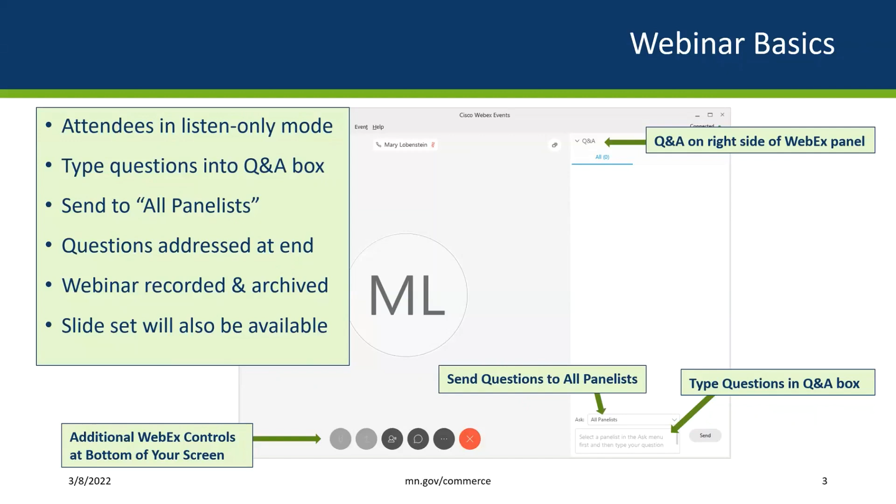This webinar is one in an ongoing series designed to summarize results from research projects funded by Minnesota's Applied Research and Development Fund, which was established in the Next Generation Energy Act of 2007. The purpose of the fund is to help Minnesota utilities achieve their energy savings goal. About $2.6 million is set aside annually for the CARD program, which awards research grants in a competitive request for proposal process. Results from CARD projects provide utilities with data to help enhance their energy efficiency program designs within their conservation improvement program portfolios.

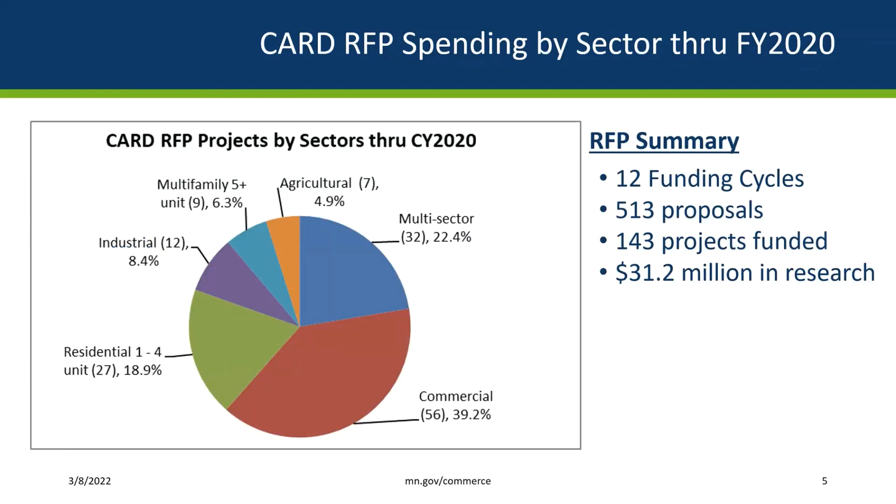Now I'm going to turn it over to Rich for today's presentation. Thank you, Mary Sue. Good morning, everyone, and welcome to the webinar. This morning we'll be discussing the demonstration of packaged central condensing tankless water heating systems in multifamily buildings.

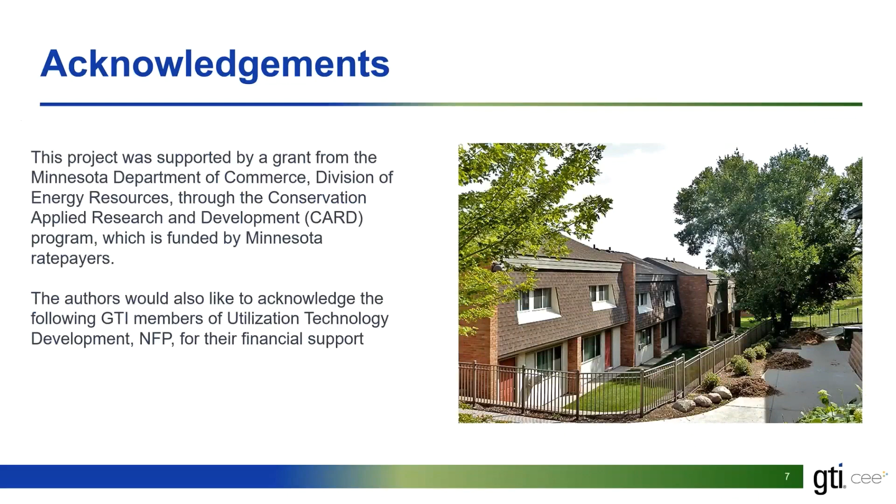Many of you may know of tankless water heaters. So instead of storage type heaters, they are tankless, and a once-through system that typically heats the hot water through a heat exchanger with natural gas or other type of fuel. The units we'll be looking at today are the condensing type, so they are most efficient in that they give up the heat that's released during the condensing process. That may be in the order of 1,000 BTUs a pound of water or so, and by doing that it operates at cooler fluid temperatures and allows for additional energy gains.

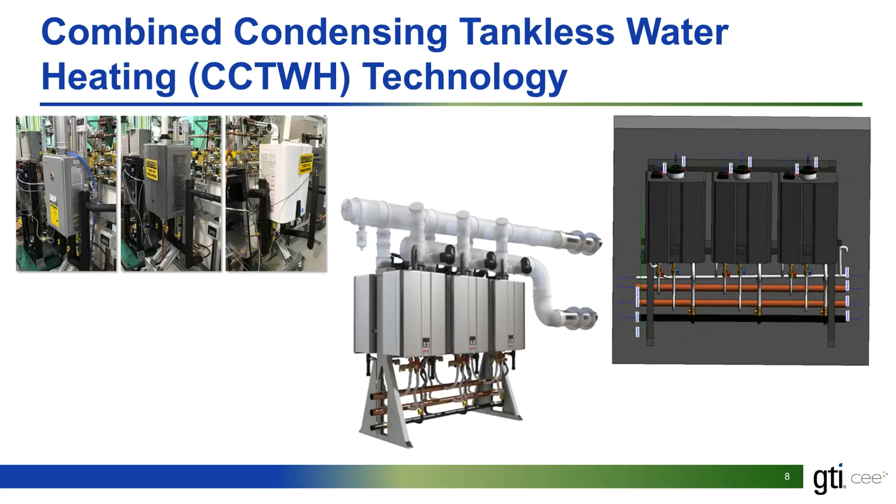The research project was essentially a demonstration of 2 combined condensing water heating systems, replacing 2 tank systems in multifamily buildings in the Twin Cities area. Part of this project was to develop an assessment tool by applying best practice calculations and field data, and then the outputs of the tool could apply to parameters within similar building types based on occupancy, number of rooms, etc.

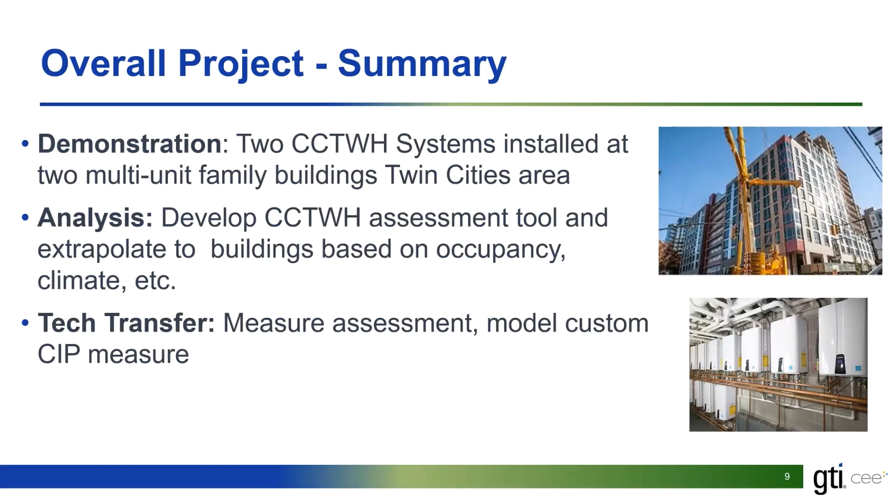The 2 baseline sites had tank systems and were monitored between 277 and 311 days. The 2 combined tankless water heating systems were monitored between 247 and 276 days. The hot water usage in these buildings was between 22 and 28 gallons per unit per day.

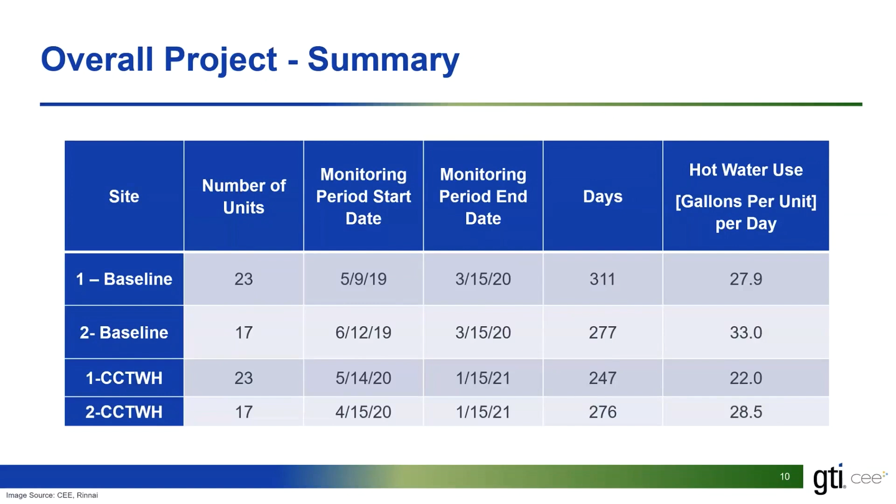Field site number 1 was in the St. Paul area, and it was essentially a 23-unit rental apartment building built in 1968. The building had both 1 and 2 bedroom units.

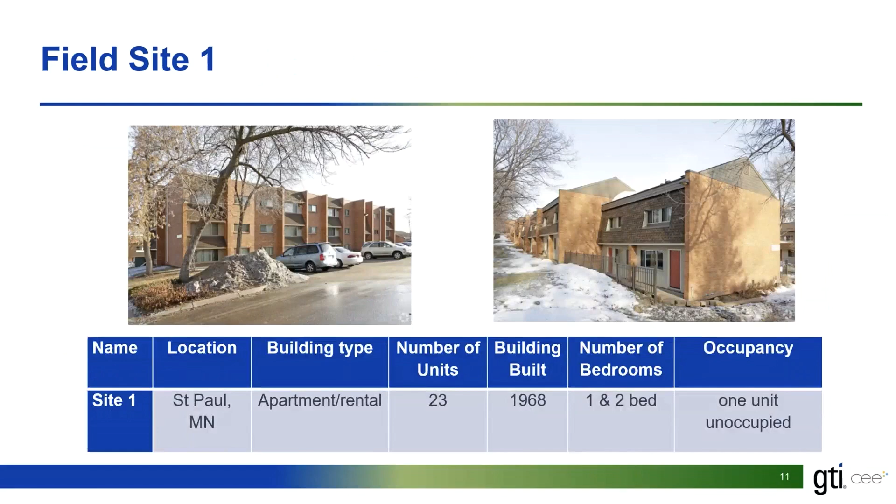Field site 2 was also in the St. Paul area, and it was a 17-unit rental apartment building built in 1970. The building had both 1 and 2 bedroom units.

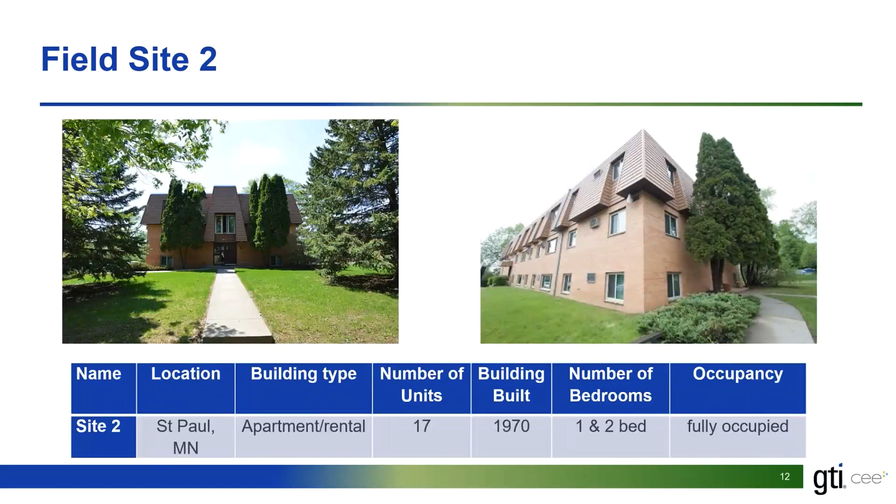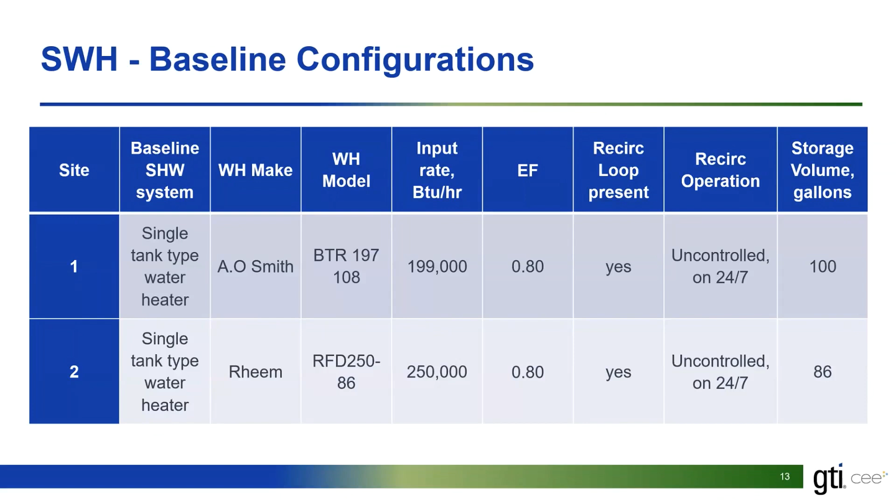The baseline configurations, which were the tank type, were at both sites. They both had single tank type water heaters. Site 1 had an A.O. Smith model with an input of about 199,000 BTUs per hour and an efficiency of about 0.8. It also had a recirc loop operating 24/7, and the storage volume was 100 gallons. The baseline system at site 2 was a Rheem model with an input of 250,000 BTUs per hour, the same 80% efficiency, and a similar 24/7 recirculation loop, and the capacity of that unit was 86 gallons.

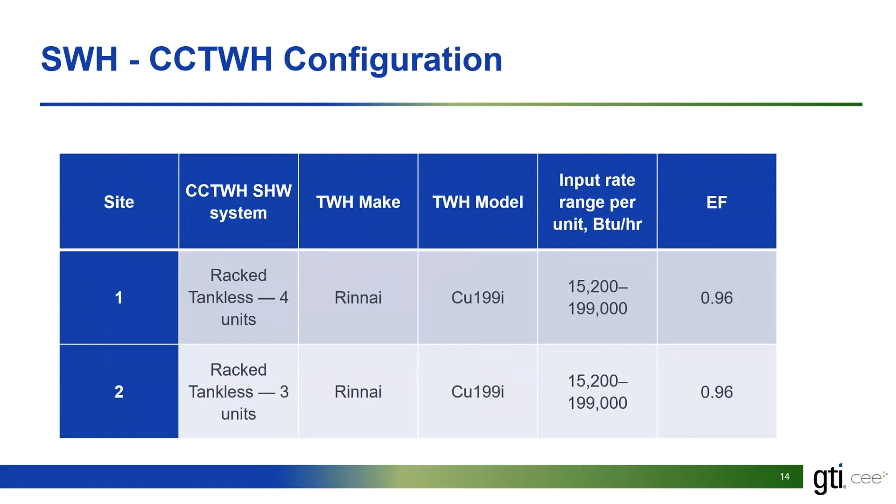The combined condensing water heating systems that replaced the baseline systems for site 1 were made up of 4 units, mounted back to back. They were all Rinnai model units with 96% efficiency. The input ratings were 199,000 BTUs per hour on the high end, and it could modulate or turn down to 15,200 BTUs an hour, which is approximately a 13-to-1 turn down ratio. Site 2 had the same make and model Rinnai units, but it had only 3 units that were mounted on the wall instead of mounted on the rack.

So now I'd like to turn it over to Alex, who will go through the data analysis in detail.

Hello, everyone. Thanks, Rich. Today I will be going over the details about the field study that we conducted, as well as our monitoring approach, plus some results for each test site and surveys that we conducted.

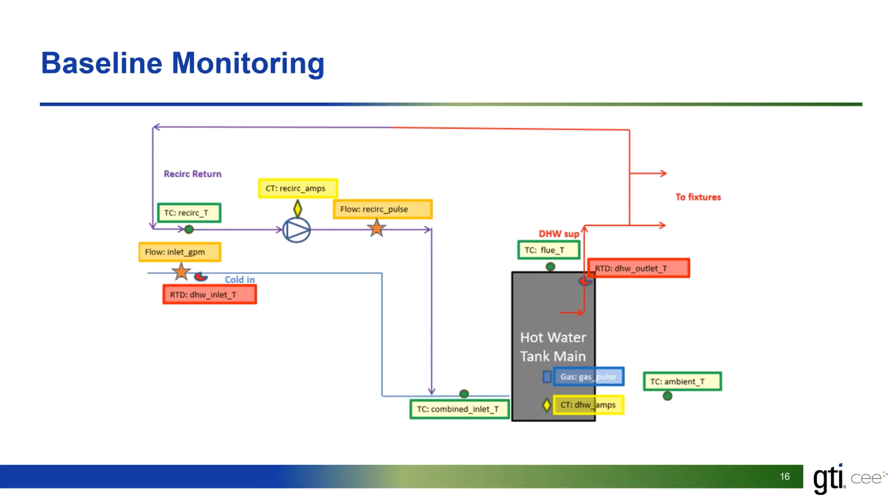This diagram shows the baseline monitoring strategy used for both field sites. A detailed monitoring package was deployed to capture 1-second data for all of the parameters shown in this diagram. The input to the system was measured using a gas meter to measure gas consumption, and a power meter measured any electric use of the system. Various system temperatures and flow rates were recorded to calculate the system output, as well as any water usage and recirculation operation.

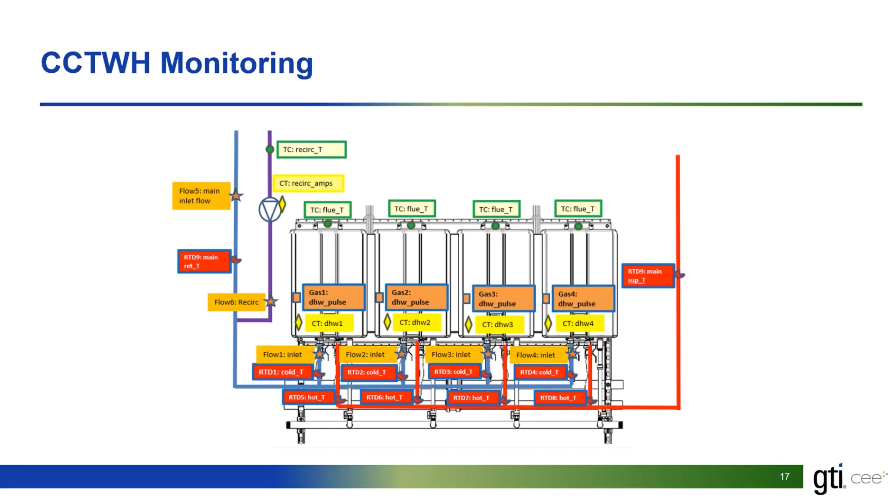This diagram shows the monitoring equipment installed on our rack system. As you can see here, this is a 4-unit rack, which matched one of our test sites - that was site 1 that Rich was mentioning earlier. Flow meters and immersion temperature sensors were installed at each individual unit, while the main system instrumentation was left in place from the baseline monitoring period, including the main flow meters and temperature sensors for the system and the recirculation loop. Input and output from each unit were measured, as well as the input and output for the entire system. By measuring at an individual unit level, this really gave us a better understanding of how each unit operated and cycled during operation.

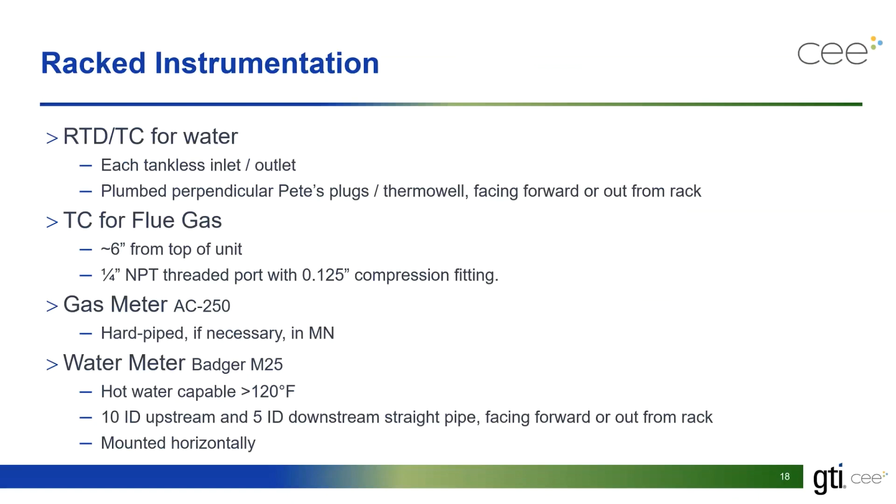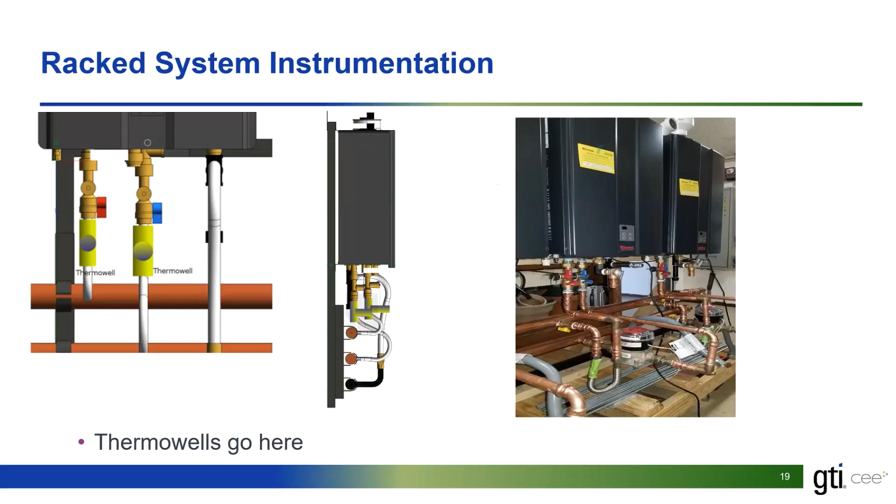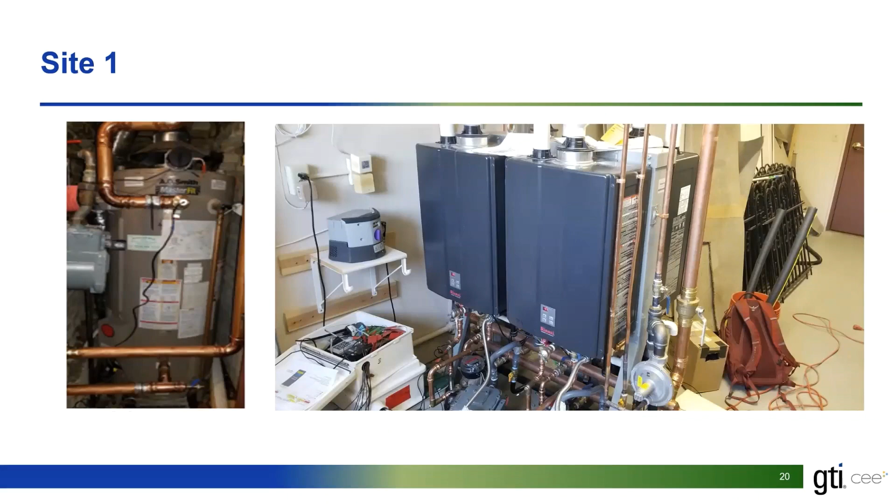Because of that, the rack system was plumbed to an adjacent room that was large enough to hold it. And since there wasn't enough wall space to mount the rack, it was placed in a 2x2 back-to-back configuration shown in the picture on the right.

Now the rack system for site 2 was placed in the same location as the existing tank. This was a mechanical space that also contained the boiler used for space heating in the building, and this was certainly more of a traditional installation for these systems.

So when we think of a rack, generally they're placed side by side and mounted on a wall, and this is done to free up space in wherever it's going. So the 3-unit rack was able to mount nicely to the wall to do this, and due to the location of some of the boiler controls, you can kind of see it in the picture on the right, they did have to be shifted to accommodate the rack system.

Again, these pictures really show the level of monitoring that we did at each site, and the system certainly looked far cleaner when we were done with our monitoring period. So there was definitely a lot of additional piping needed for our equipment.

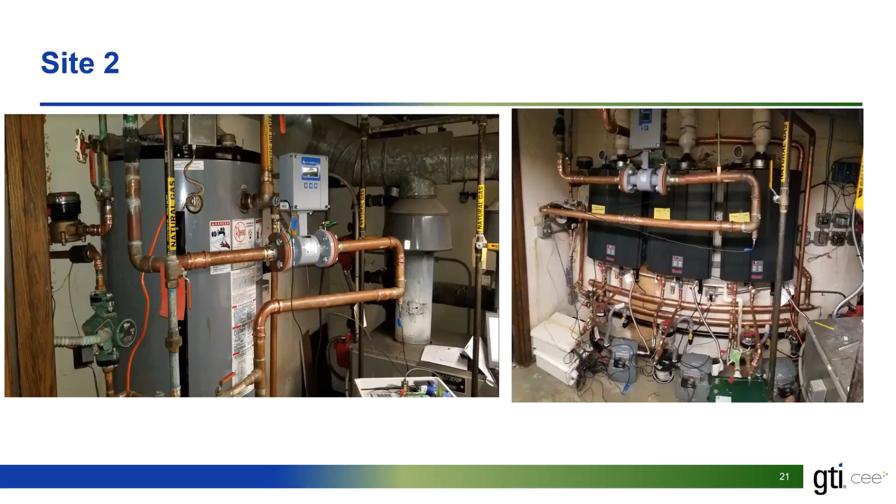Since the Twin Cities area gets a lot of our water from the Mississippi River, this can vary the water temperature significantly and have an impact on how much energy a water heater uses. Colder water obviously needs more energy to be heated up, which will vary the energy input to each system throughout the year. In addition, when water is mixed at a faucet, colder inlet water, think about in the wintertime, would require a higher percentage of hot water to mix it to the same temperature as it would when the inlet temperature is warmer, in the summertime.

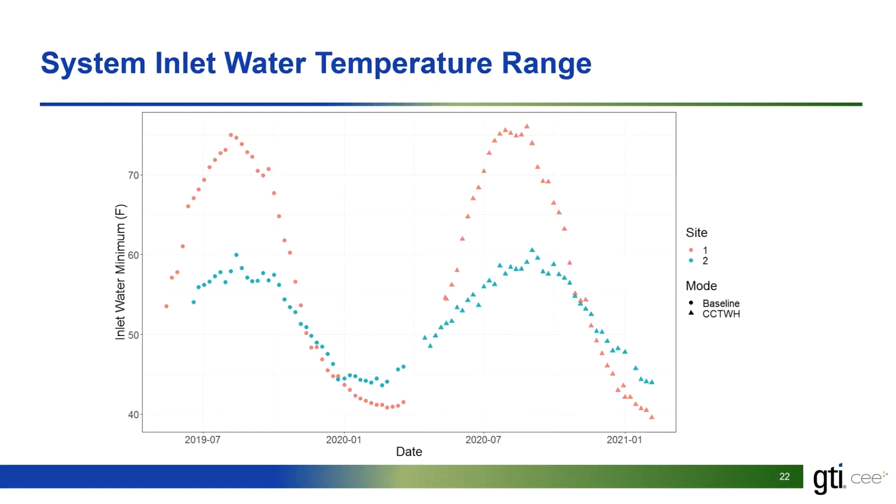So you can really see the impact that the water temperature has on water heating systems and how they actually operate.

Overall, I'd say that the water temperatures and the flows remained consistent between the tank type system and the rack system, and ultimately, the rack units were able to maintain a very consistent supply water temperature throughout the project.

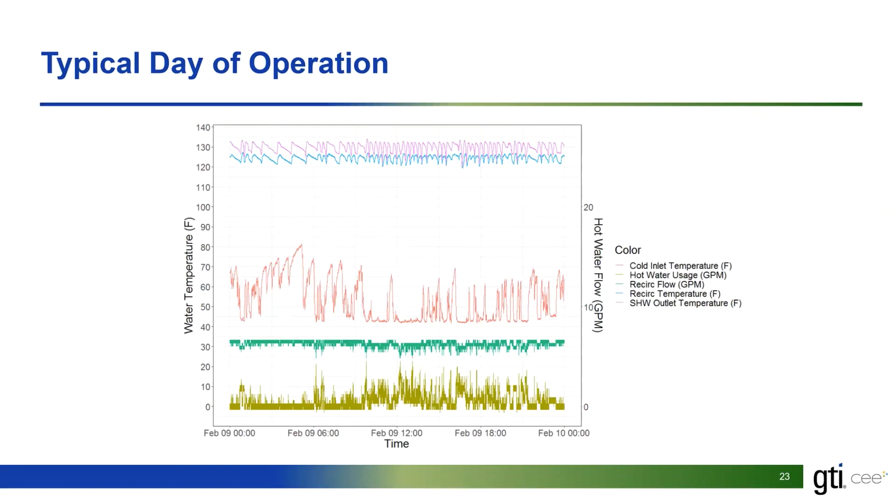Usage remains relatively stable throughout the day with another moderate spike between 9 and 10 p.m. This pattern of hot water use is relatively common for a multifamily setting like the 2 field sites that we looked at.

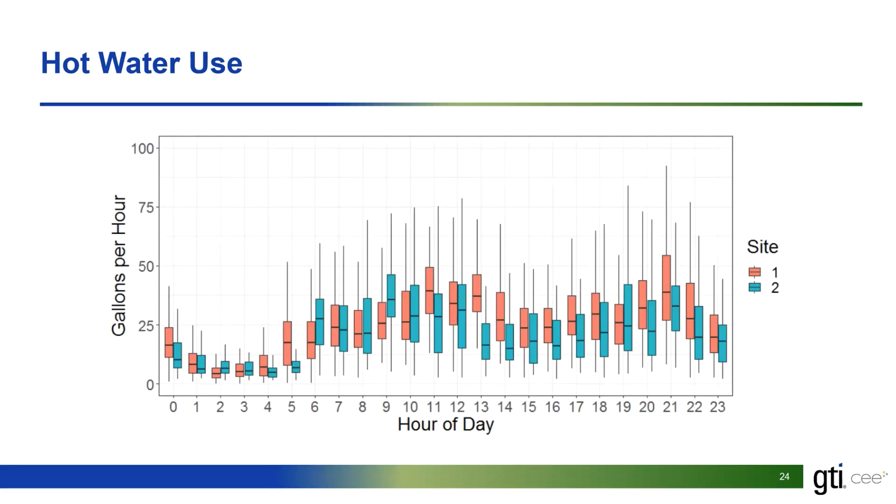Since there is a recirculation loop at each building that operates pretty much constantly throughout the day, there's always a constant draw of hot water throughout the building. By using a cascade setup, that's what they call it, one of the units is set as the primary unit, and each additional unit is a secondary unit tied together with a communication cable.

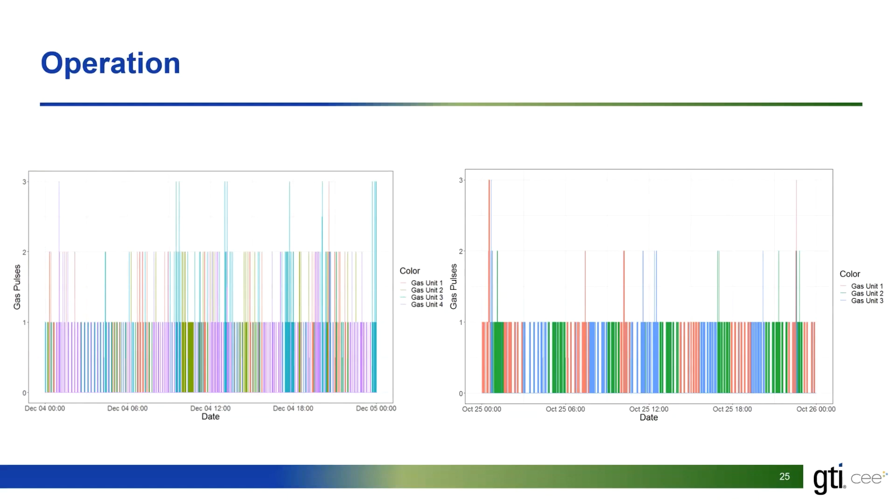With the primary unit acting as the controller, this connection will rotate water heater operation order to ensure equal usage among the entire system and enables all water heaters connected to modulate operation and function really as one hot water source. By operating this way, this should result in prolonged life of each unit in the system, assuming that proper maintenance practices are followed.

Since both test sites were multifamily buildings, there was always a reasonable amount of hot water use, so the efficiency of the tank type system remains fairly flat.

Past research has shown us that when hot water use drops off and gets closer to zero, think of a single family home where each point on this plot is a daily delivered capacity. If someone doesn't take a shower or overall hot water use is low, the efficiency of the system will drop off and get closer to zero.

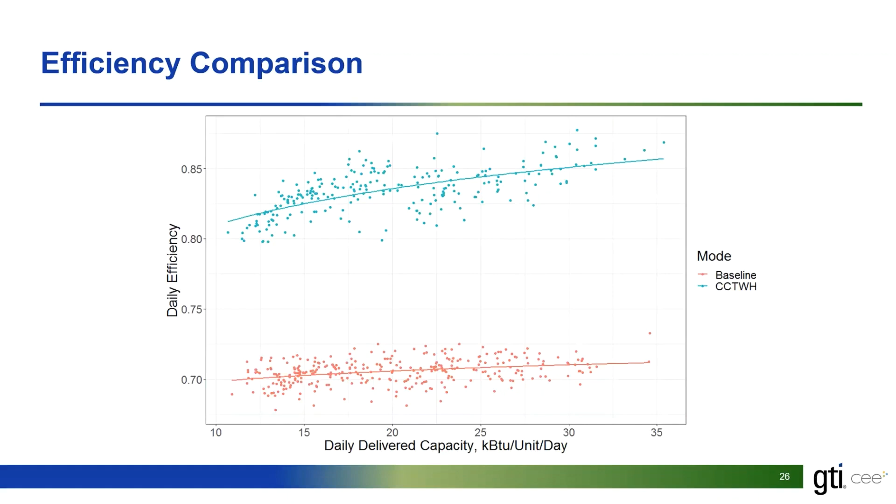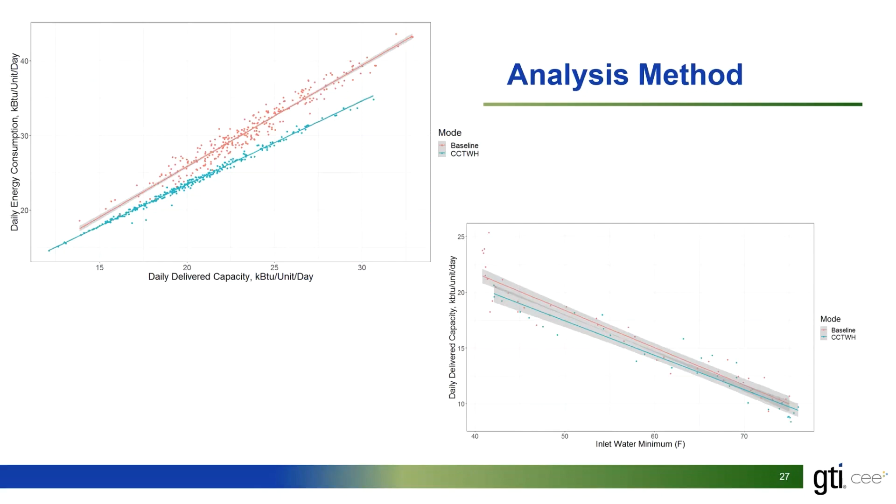We performed analysis for both, really two ways, for the entire system as well as the water heater only. The entire system includes the recirculation loop.

This is a loop that's constantly moving hot water throughout the building, so tenants really always have hot water quickly when they turn on a fixture. And then there are losses associated with that recirculation loop.

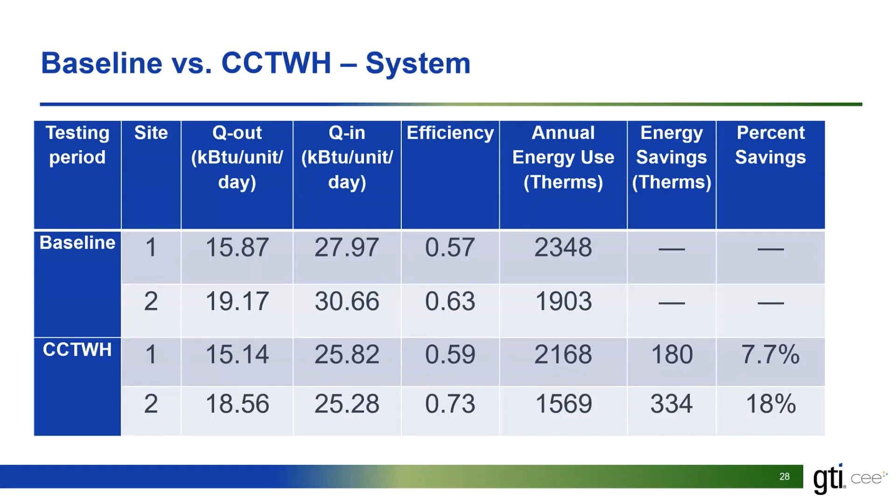Since heat is lost as water constantly circulates throughout the building, overall efficiencies are low due to the recirculation losses. Overall, we found that the rack system showed a savings of about 8% for Site 1 and 18% for Site 2.

Here we have the results of the analysis of only the water heaters. This focuses just on the efficiency of both the tank type system versus the rack system. Overall, we can see much higher efficiencies when comparing it to the complete system.

This really highlights the high efficiency operation of the rack tankless units, with efficiencies in the mid to upper 80s, which is consistent with past tankless water heater research. So savings come in around 7% for Site 1 and 18% for Site 2.

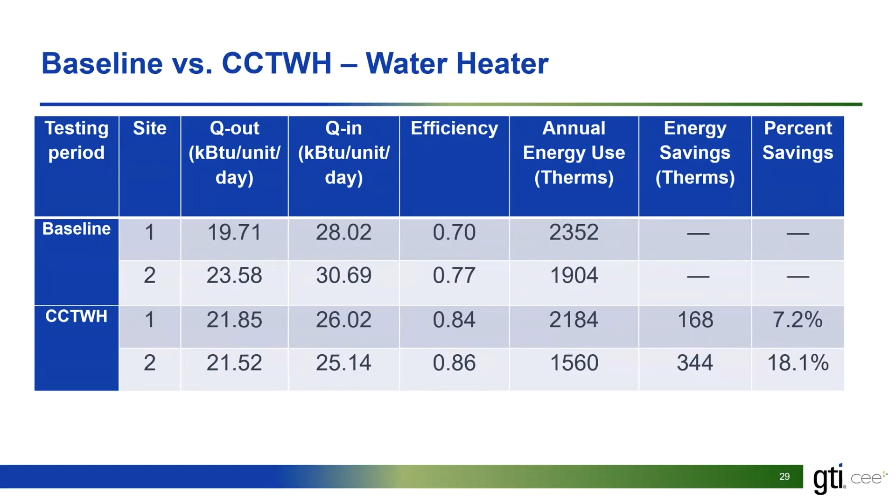The maintenance of these systems is pretty much identical to a standard single tankless water heater. When comparing to a tank type system, there's certainly some additional maintenance that can prolong the life of each unit.

For a tank type system, generally the recommended maintenance is to drain a few gallons of hot water from the system to remove any sediment at the bottom of the tank.

Due to the nature of how a tankless unit operates, there are a few preventative maintenance actions that are recommended. The main maintenance piece is to flush a solution of vinegar and water throughout the heat exchanger, and that's really done to prevent scale buildup.

If an individual unit of a rack system fails or needs repair, it can be replaced or serviced on an individual basis, so while one unit is serviced, the other units in the rack will still function. This really allows system maintenance to occur without shutting off the hot water to the building, which is certainly an added benefit.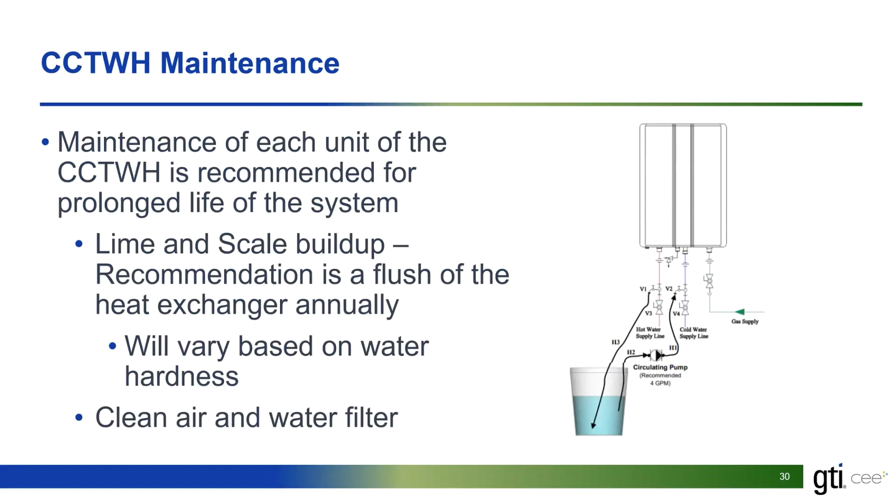Also, failed units can be replaced individually, so this means that the entire rack doesn't need to be all replaced at once.

Getting into some surveys that we conducted, building owners, tenants, and the contractor who installed both systems were interviewed really to get a better understanding of the overall impressions of the rack system compared to a standard tank type water heater. They were asked about things like the quality of delivered hot water and how each system was maintained.

They were also asked about the importance of the non-energy benefits that the rack system offers, as well as any challenges and complexities of each system that they wanted to highlight.

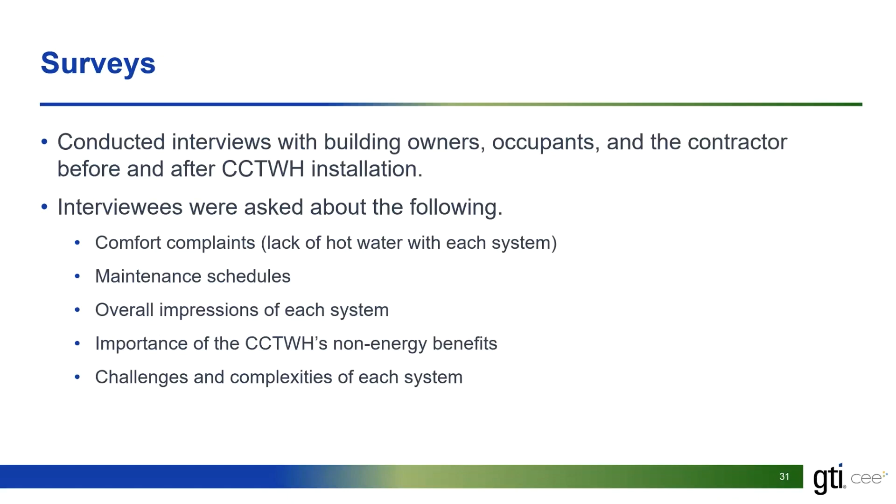Overall, building owners were pleased with the rack system. Their main concern going into the project was the reliability of the system and its ability to deliver hot water at all times. While this was a concern, it was outweighed by the potential energy savings of the rack system, so there weren't any major complaints during the test period, and both owners and tenants were pretty satisfied.

Tenants were given a detailed survey asking about things like hot water delay, fluctuation of temperature, running out of hot water during long periods of use, and maintaining a steady water temperature. Our goal was for tenants not to experience any drop off in hot water quality from the tank type system to the rack system.

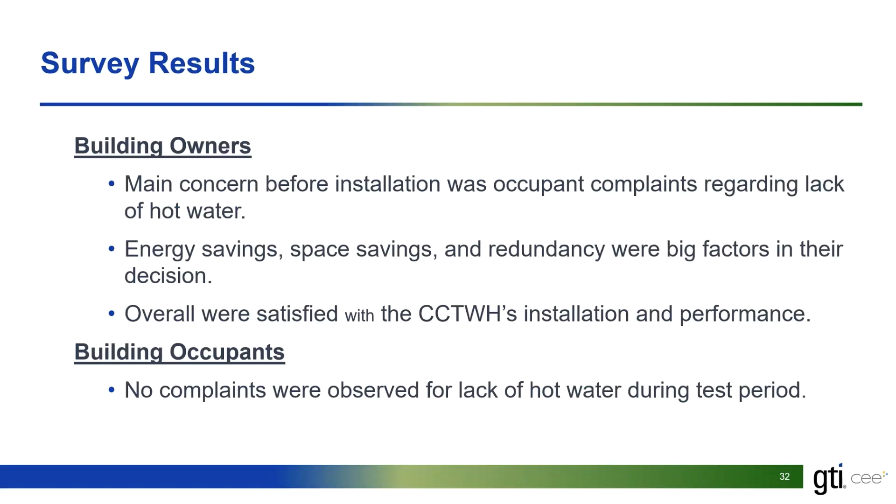Since a large tank of hot water offers consistent hot water, that is until the tank runs out—which is pretty rare for a multifamily property—this is something we wanted to document. The survey results showed that tenants were very pleased with the rack system, with most stating they didn't notice a significant difference in the hot water they were receiving.

The contractor we worked with had not installed the rack system before, but definitely had experience with tankless hot water systems. The potential issues they brought up included space constrictions and venting of the exhaust, both of which were easily addressed during installation. In general, they stated these systems would save space in most installations, and overall the contractor had a positive experience with the installation and performance of the rack system.

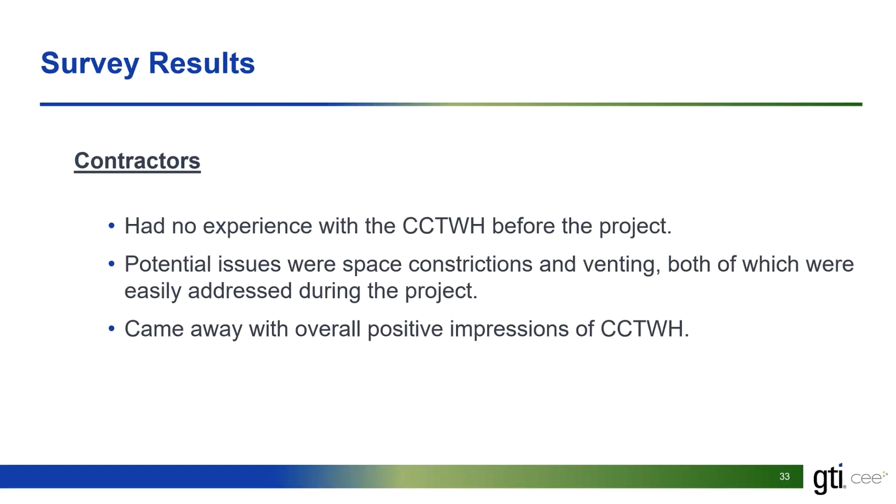So I will throw it back to Rich.

Thank you, Alex. What I'd like to do now is review the assessment tool that we put together regarding the best practice design standards. It's an informative tool, and the engine behind it is essentially calculations from sources including the ASHRAE Applications Handbook, ASHRAE Research, Transactions, ACEEE proceedings, California Energy Commission, and the like.

The idea is to use it on a comparative basis where you can select a certain building type and put in certain climate zones, which would then refer to certain mains temperatures. You can change the number of rooms, the number of people, the water demand, set point temperatures. It has variations for recirculation loop efficiencies, number of fixtures, and the like. We can go into more detail later, but essentially the tool uses field data from the recirculation loop to enhance these calculations.

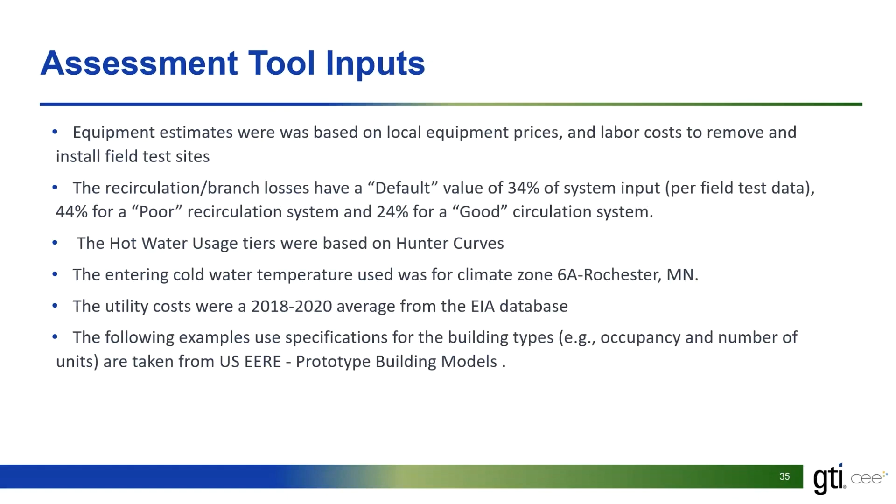It could be number of dwelling units or number of rooms, and there can be estimated daily occupancy, say for an office building. It can calculate your fixture units essentially by the Hunter curves, or it gives you an option to put in custom fixture units. Then there's hot water recirculation efficiencies, pump sizes, a diversity factor, yes or no, and hot water characteristics regarding usage level and thermostat temperature from the water heater itself.

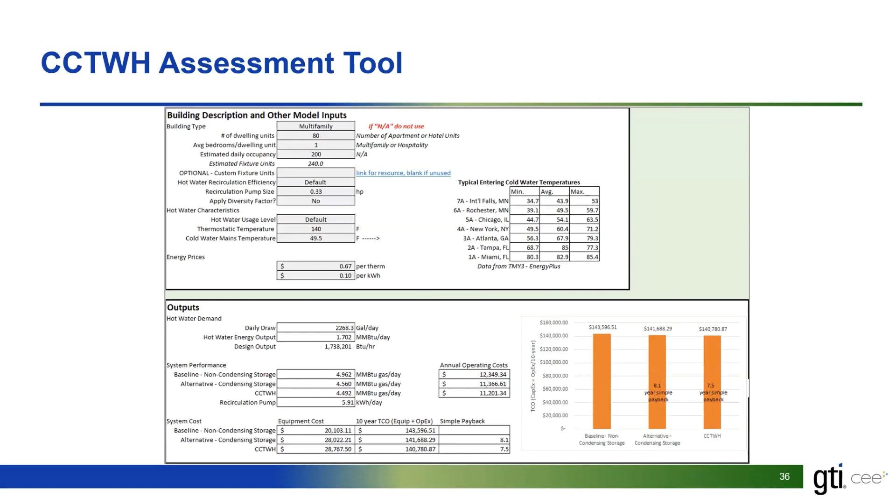It does that by looking at certain 10-year cost of ownership, types of pricing, and payback periods. So for example, a model such as this, which is your basic energy model for an apartment high-rise, would tell us within this tool that there are 80 units in this building, 10 floors, 8 units per floor, 950 square feet per unit, and there's also other information we can touch on, which includes orientation and aspect ratios.

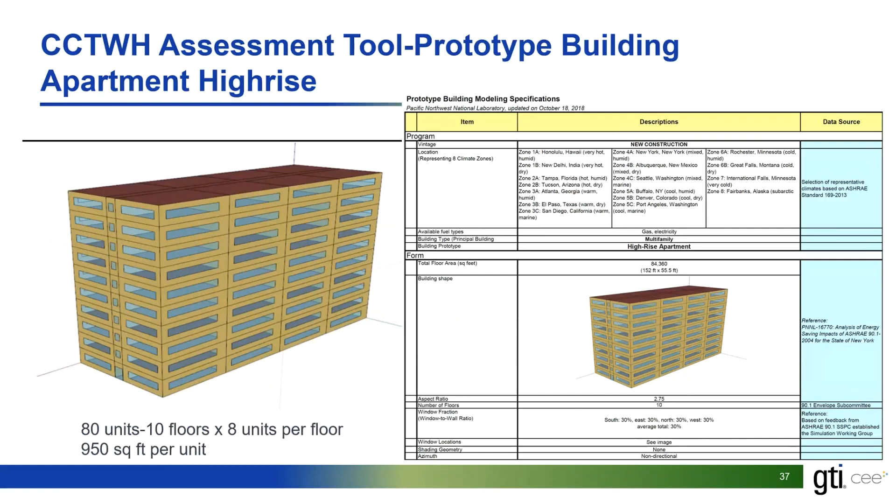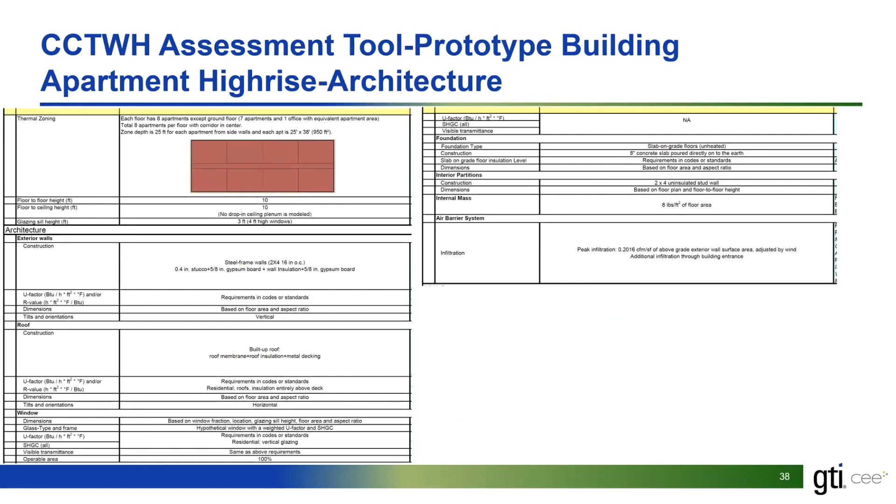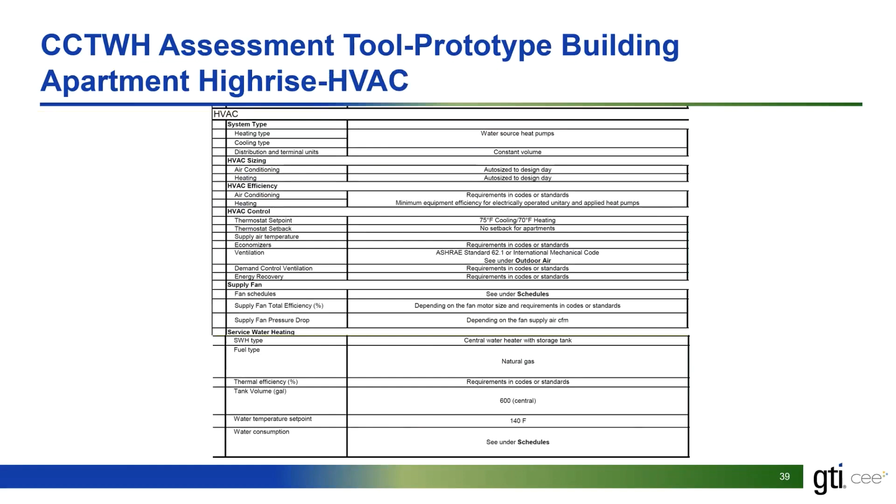The other information includes, for energy modeling, thermal zones, wall construction, roof construction, air barriers, foundation types, HVAC system sizing recommendations, recommended efficiencies, control system set points, minimum outside air ventilation rates, fan schedules, water heating recommendations, and then it goes into things like zone characteristics, lighting loads, and plug loads.

But it does show, for 75% of the building stock out there, the average size and number of people. So there's 200 people for this apartment high rise, and for this particular model, which includes 75% of the building stock in the United States.

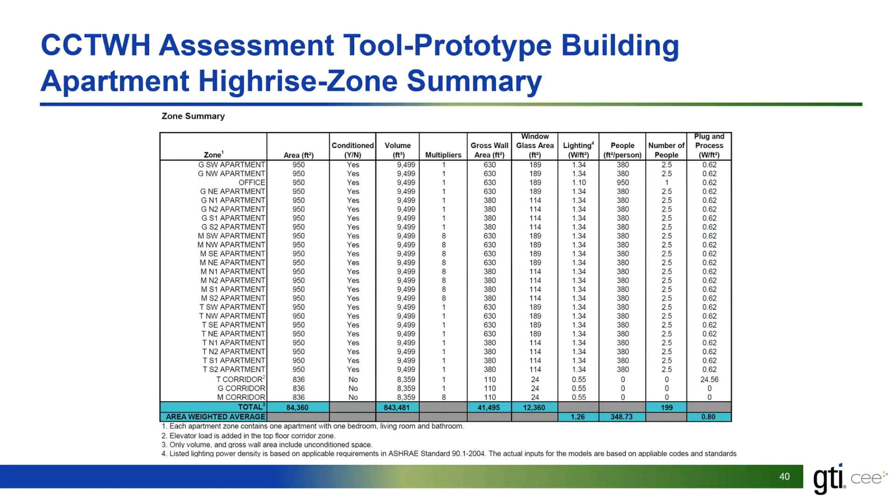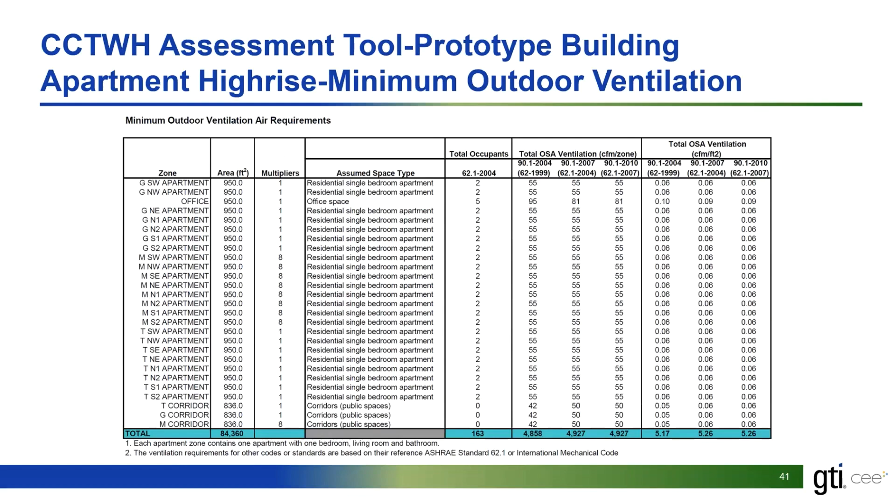So we can use this on a comparative basis in the same way. Not all this information is necessarily needed for this particular assessment tool, but it's available if we enhance the tool or there's other energy calculations that need to be done. In the end, we're using this overall building size, room sizes, and number of occupants. That's what's necessary for this particular tool.

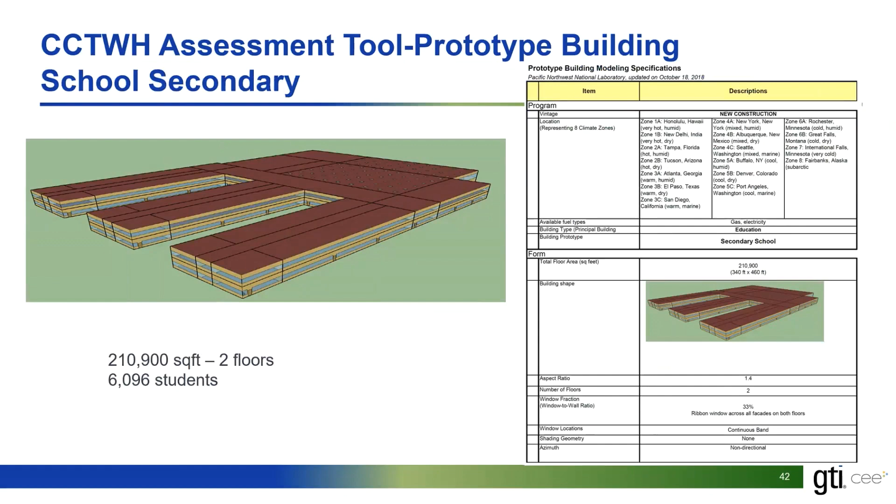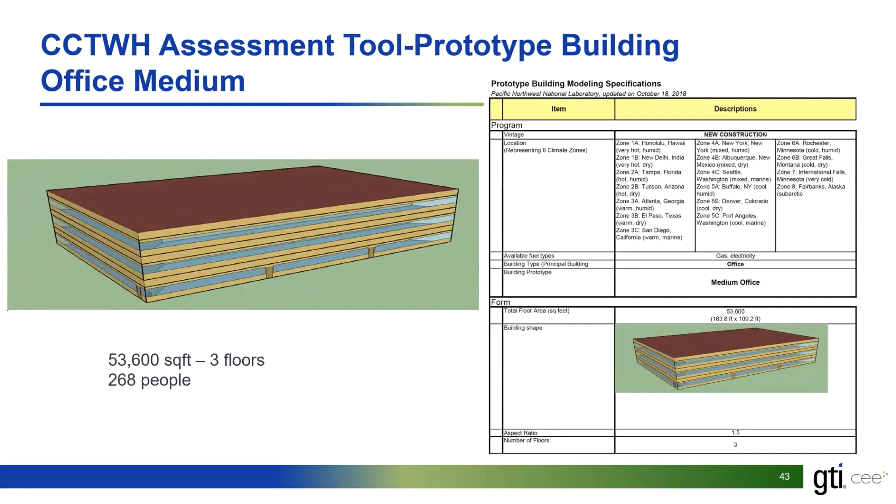So what the prototype building is for a secondary school is 2 floors with a total area of 210,900 square feet and 6,096 students. That's the average. For a medium-sized office building, it's 3 floors at 53,600 square feet and 268 people. For a small hotel, it's 4 floors, 259 people.

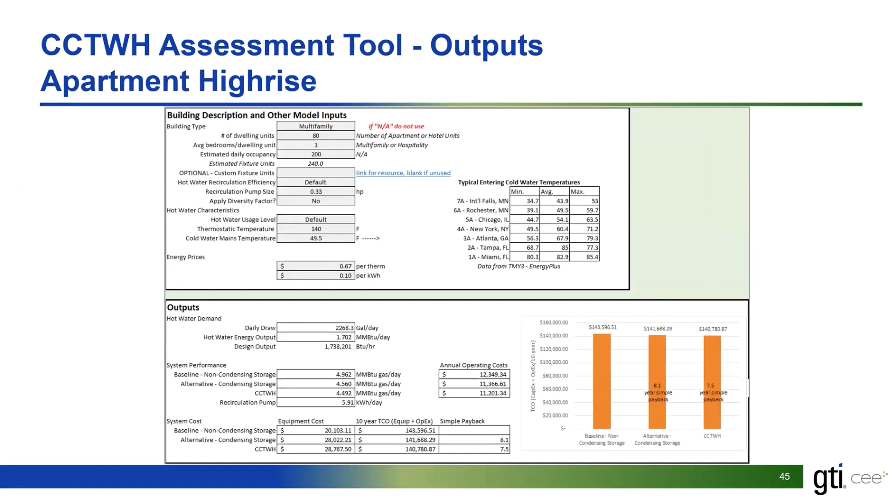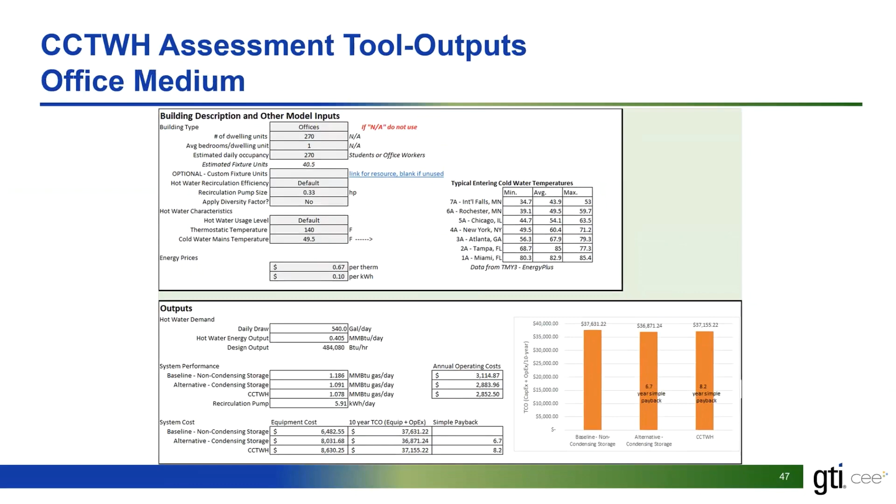And then if we go ahead and put this information into this tool, we can look at different building types with certain default settings. So if we just defaulted the recirculation efficiency, the hot water usage, and things like that, we come out with certain outputs such as this for the apartment high rise, in the same way for the secondary school, for office, a medium office building, a large office building. And we can tabulate that information.

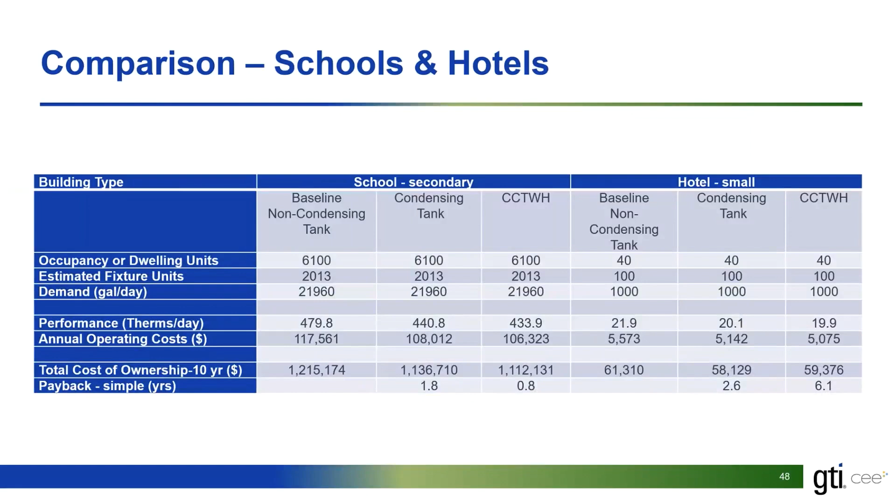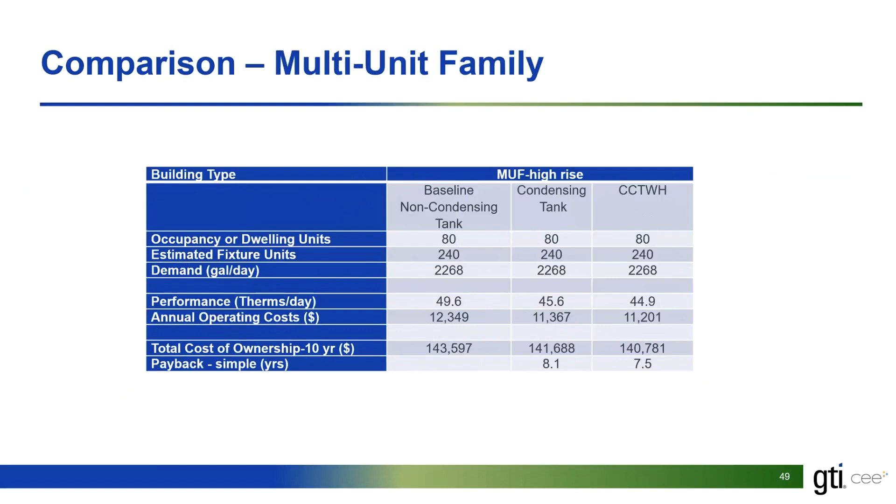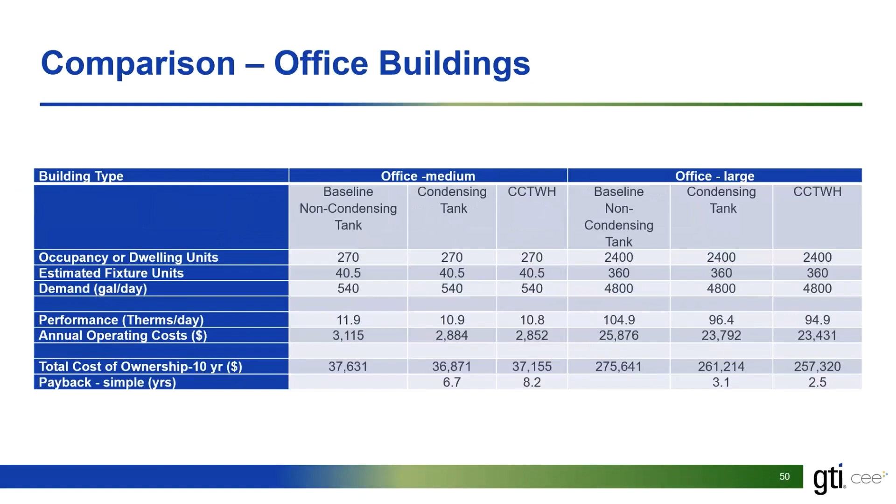What we find from the tool and these calculations is that school applications have shorter paybacks than smaller demand applications. So a payback less than a year, some schools may have, based on these best practice calculations. A larger multifamily unit of 80 units might have a 7.5 to 8 year payback. And office buildings, as they change from 270 occupancy to 2,400 occupancy, we notice that the payback goes down. So what we're essentially seeing is, as the demand increases, the efficiency and payback decreases.

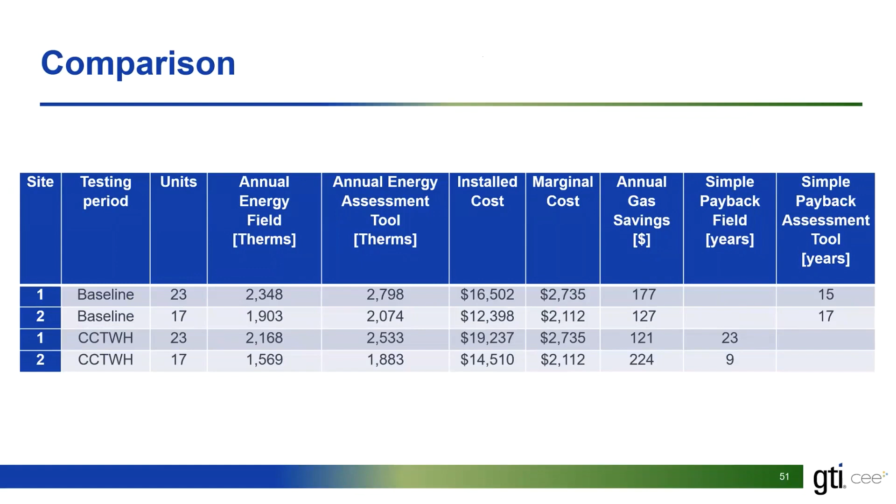So then if we were to look at the simple payback, as Alex mentioned, the savings at the field test site would be between 9 and 23 years, and we look at the tool based on certain calculations, and it's midway in between what we found in the field based on the therms calculated within the tool.

So then what we found essentially is that the 2 sites during the 22-month field test period show that condensing combined tankless water heating systems can be successfully installed and operated in multi-unit applications in northern Midwest climates. It provided energy savings with no significant change in hot water delivery or complaints. The combined tankless water heating system can save energy over the storage systems. Alex mentioned 12.7% of energy consumed, 18% on one site, 7% on the other site.

The system efficiencies for the first site were 57% in the baseline and 59% in the tankless water heating site, and 63% in the baseline and 73% in the second site. The measured water heater efficiencies are lower than the rated, as Alex mentioned.

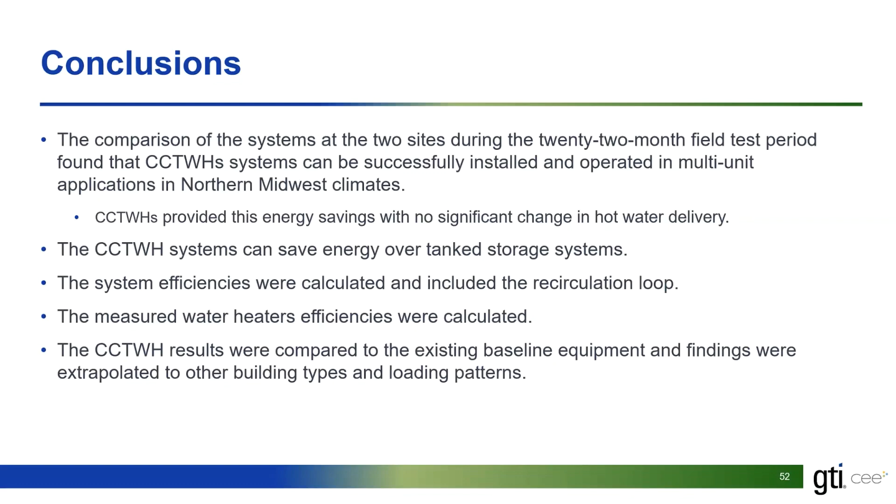The particular results were then compared to existing baseline equipment, and we did extrapolate it to other building types and loading patterns based on specific design calculations typical within the industry. We went ahead and applied those to sizing that was developed in multifamily units, hospitality, and schools.

The initial cost can be a significant hurdle for many properties. There is, however, a reduced footprint that was frequently cited for increased market share. A smaller footprint would benefit both new construction and retrofit applications.

The control sequence, the cascaded control system that Alex mentioned, I think is a benefit to longer life and unique to this particular system. And the savings can be enhanced for this particular system by using well-insulated recirculation loops and perhaps the addition of demand control on those recirculation loops.

Thank you. Appreciate your attention.